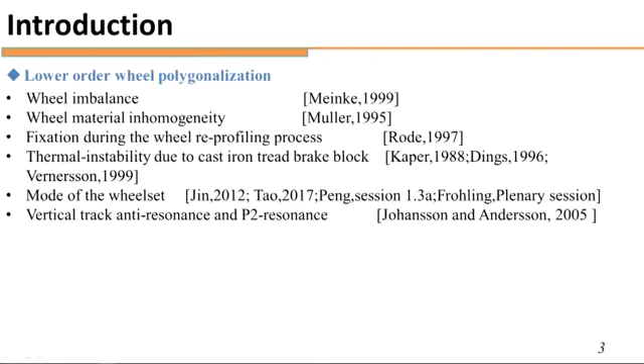As we know, the polygonal wear is one of the greatest concerns of railway vehicles, and the polygonal wear with relatively lower order or lower frequency has been investigated by many researchers. This could be caused by many different reasons.

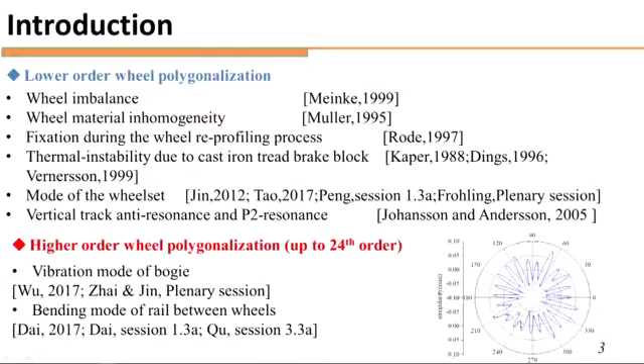However, since 2014, the high-order wheel polygonalization broke out on China's high-speed lines, and the dominant order can be up to the 24th order. If you have listened to the previous presentations in the conference, you will find that the mechanism of the high-order polygonalization is still in dispute.

Some researchers believe that the vibration mode of the bogie is the driving factor, while others think the bending mode of the rail between the wheelsets is the main reason. Our paper will give a possible explanation to the high-order polygonalization through experiment and simulation.

Okay, let's see the characteristics of the high-order wheel polygonalization. These figures show the typical polygonalization on different types of trains with different operating speeds. As you can see, when the speed is 250 kilometers per hour, the wheels exhibit 22nd to 24th order.

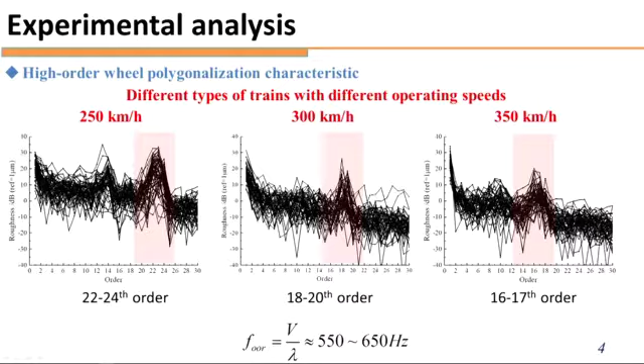When the speed is 300 kilometers per hour, the dominant order becomes 18th to 20th, and as for the 350 kilometers per hour EMUs, the wheels commonly exhibit 16th to 17th order.

This data shows a coincidence that the passing frequency of these different orders of polygonal wear are all in the range of 550 to 650 Hertz, regardless of the speeds, which conforms to the constant frequency mechanism.

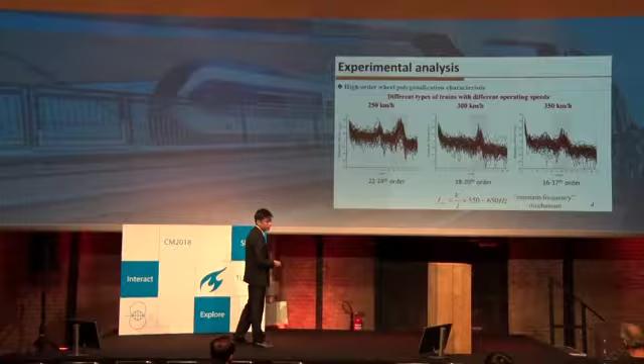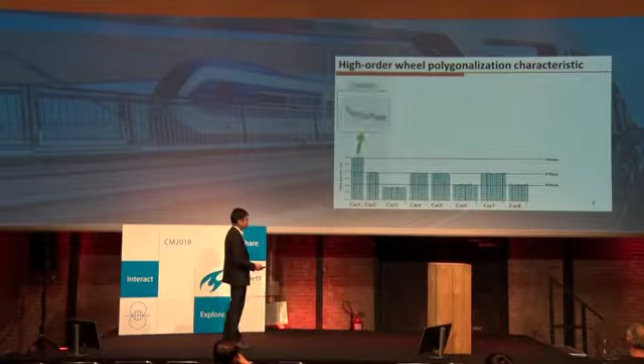Further evidence for the constant frequency mechanism can be found on wheels with different diameters. When the diameter is different, the dominant order of the polygonal wear is also different, but their passing frequency is almost the same.

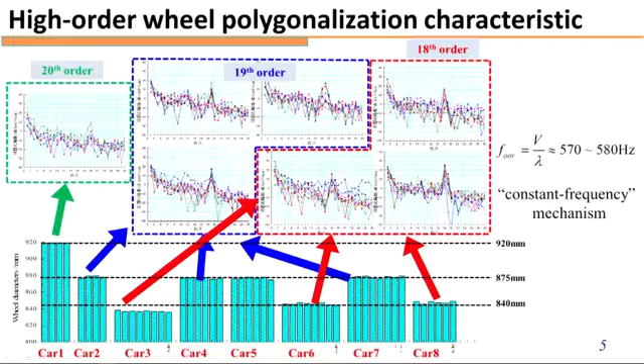Apart from the wear measurement, the dynamic behavior of the high-speed trains was also tested. As we know, once the polygonal wear forms, the vehicle track system will be under a forced vibration condition.

Therefore, in order to understand the initial stage of the high-order polygonal wear, the vibration of the vehicle should be tested immediately after the wheel re-profiling.

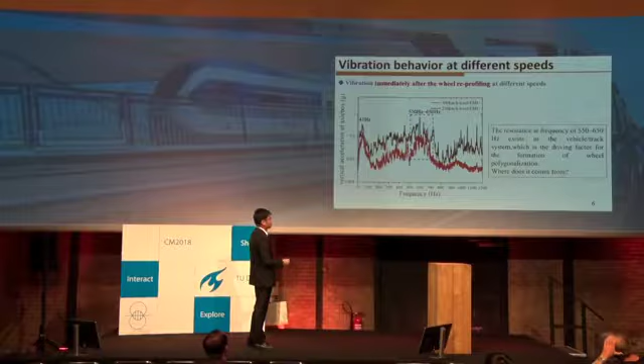Therefore, it is induced that the resonance at the frequency of 550 to 650 Hertz exists in the vehicle track system, which is a driving factor for the formation of wheel polygonalization.

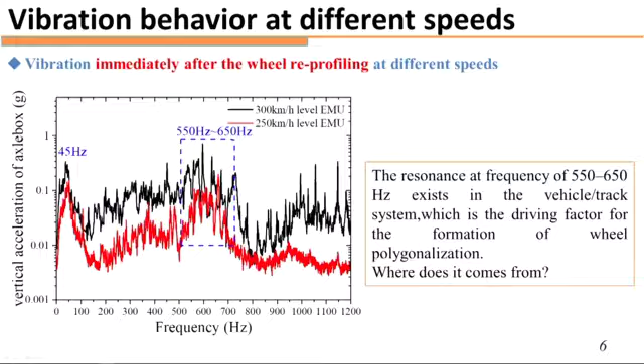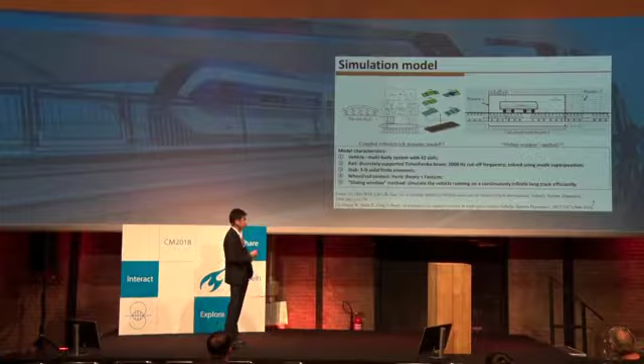In order to identify the origin of this resonance, a coupled vehicle track dynamic model is established based on Professor Zhai's work. The vehicle is modeled as a multi-body system, and the rail is described by a discretely supported Timoshenko beam, with the cutoff frequency up to 2,000 Hertz to cover the passing frequency of the high-order polygonal wear.

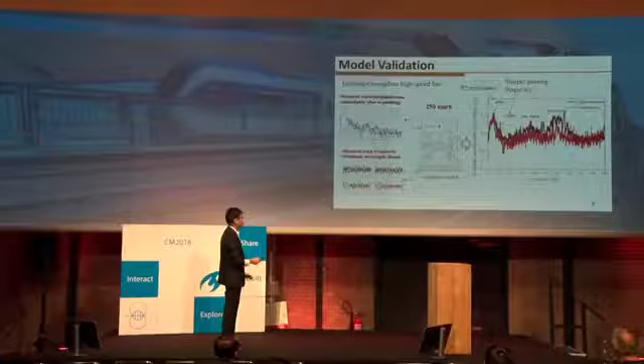The model is validated by comparing its dynamic response to the measured one. The vertical acceleration of the axle box was measured in the field when the vehicle operated at the speed of 250 kilometers per hour

on the Guiyang to Guangzhou high-speed line. Meanwhile, the wheel polygonization and the track irregularities are both measured and input to the dynamic model.

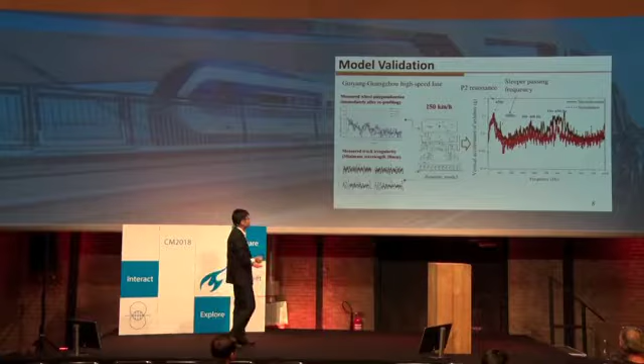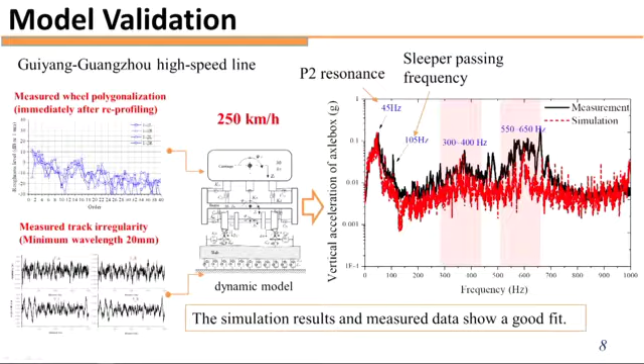As you can see, the simulation results and the measured data show a good fit. This is the P2 resonance, sleeper passing frequency, and the peaks at relatively higher frequency are believed to be associated with the formation of the high-order polygonal wear.

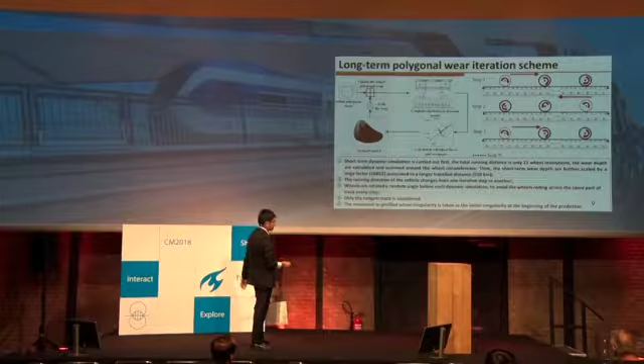After the validation, the dynamic model is combined with the wheel wear model, and the long-term wheel iteration model is established. Due to time limitations, I will not introduce the details much here, but some special points should be pointed out.

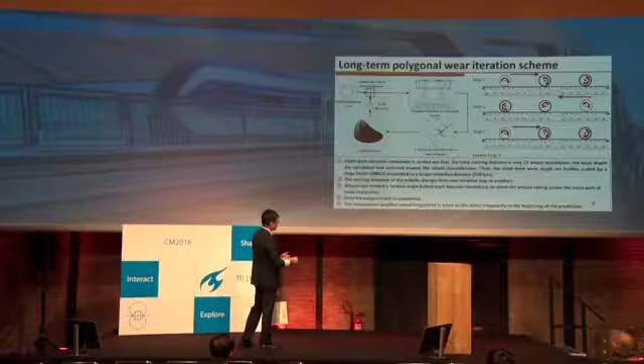In order to simulate the real condition of operation in China, the running direction of the vehicle changes from one iteration to another, and the wheel is intentionally rotated by a random angle before each dynamic simulation to avoid

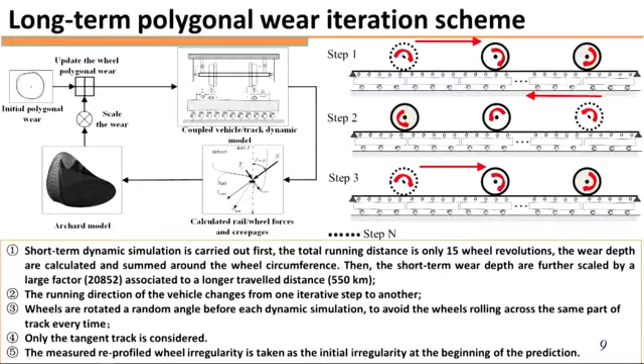the wheels rolling across the same part of the track every time. And only the tangent track is considered. In our simulations, the measured reprofiled wheel irregularity is taken as the initial irregularity at the beginning of the simulation.

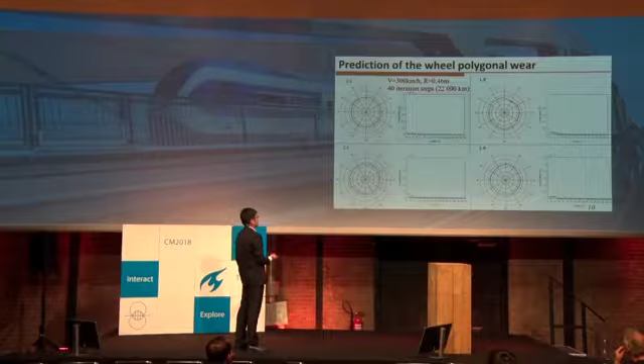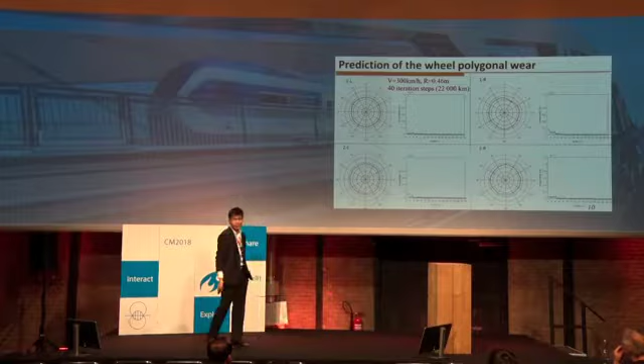When we set the speed to 300 kilometers per hour, it works. The radius is 0.46 meter, and after 40 iteration steps, the wheel irregularities develop into a high order polygonal wheel gradually, with the dominant order being 20th.

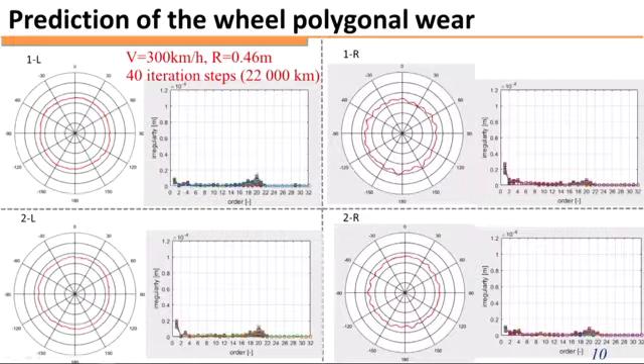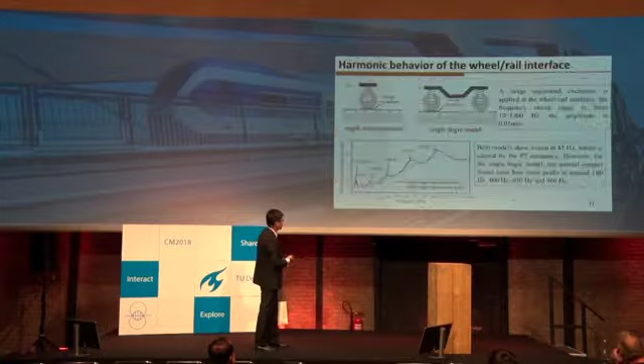However, until now, where the polygonal wheel originates from is still not identified. In the next part, the harmonic behavior of the wheel-rail interface is calculated. In our work, two scenarios are considered: one is the single wheel set model, and the other is a single bogie model. A swept sinusoidal excitation is applied at the wheel-rail interface.

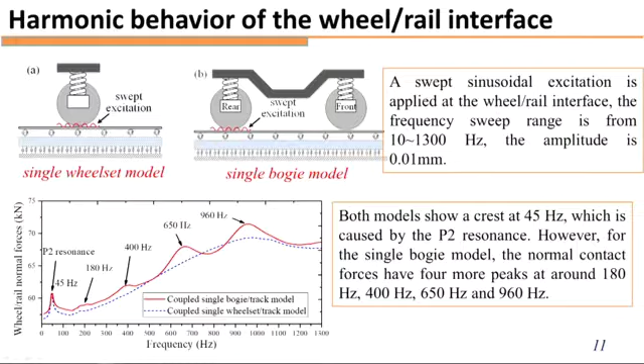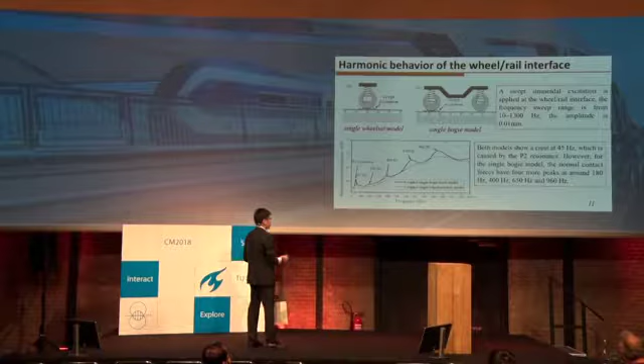This is the response of the wheel-rail normal forces obtained from these two models. Both models show a crest at 45 Hertz, however, for the single bogie model, the normal contact forces have 4 more peaks at around 180 Hertz, 400 Hertz, 650 Hertz, and 960 Hertz. According to previous research, these 4 peaks may be attributed to

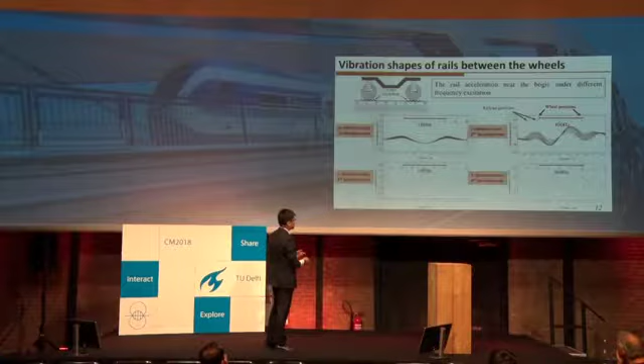the wave reflection between the front and the rear wheel in the, sorry, it doesn't move.

As you can see, we plot the rail acceleration near the bogie on different frequency excitations. We can see the wheels in a bogie play a role of constraints to the rail, and the rail has a large vibration between the two wheels in a bogie.

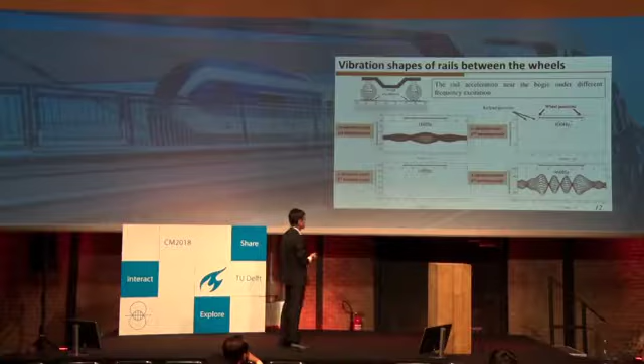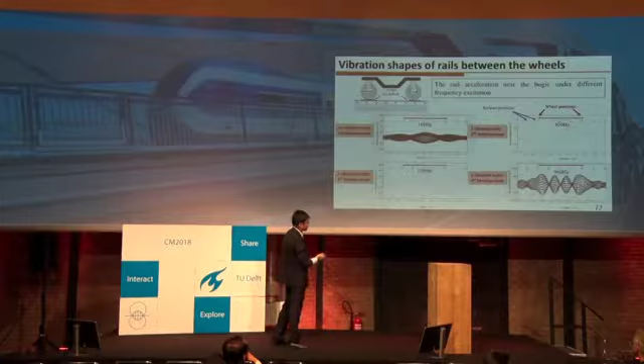When the excitation is 118 Hertz, 400 Hertz, 650 Hertz and 960 Hertz, the vibration shape of the rail between the wheels has 0 node, 1 node, 2 nodes, and 3 nodes, which conforms to the first, second, third, and fourth order bending modes of the rail between the wheels.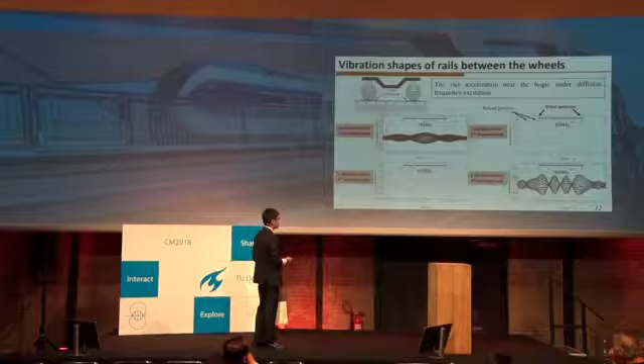Furthermore, the frequency of the third order bending mode is close to the passing frequency of the high order polygonal wheel. It is thus induced that this could be the main contributor.

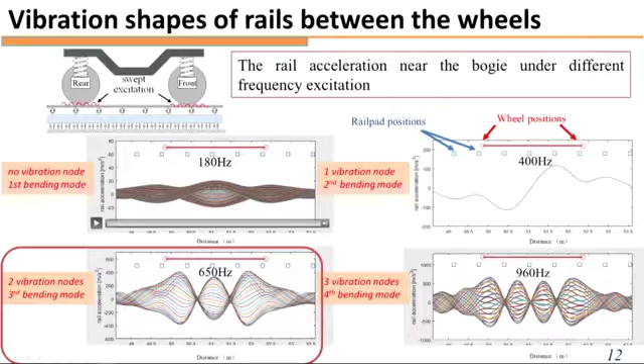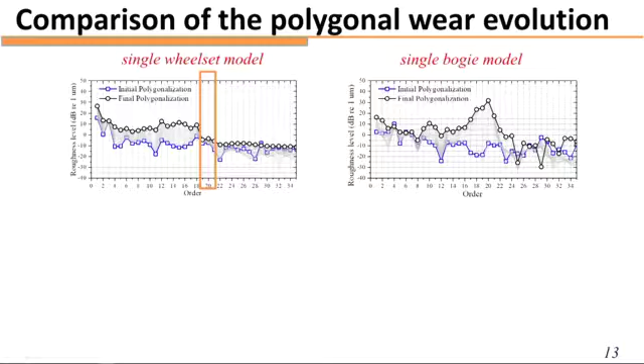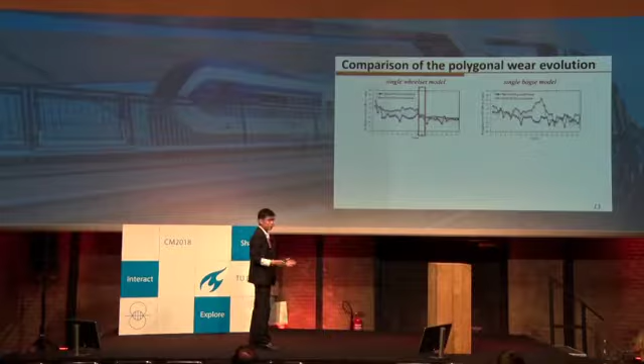Also, we give the comparison of the polygonal wheel evolution when using the single wheel set model and the single bogie model. As you can see, the 20th order polygonal wheel does not form in the single wheel set model. Obviously, it is because the rail resonance between the wheels cannot be considered in the single wheel set model.

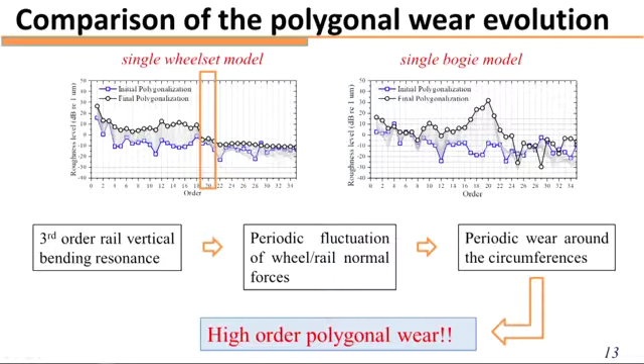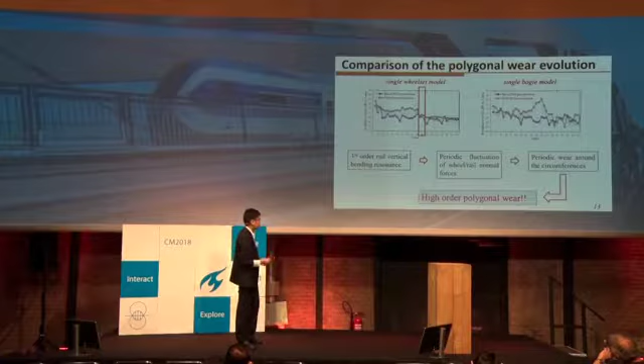Now we can say that it makes us believe that the third order rail vertical bending resonance between the wheels leads to the periodical fluctuation of the wheel-rail normal forces and further causes the periodical wear around the circumference, and finally the higher order polygonal wear forms.

The last part is the parametric studies. Firstly, we change the operating speed. Under different speeds, the wear grows to different dominant orders, and the simulated dominant orders do agree with those mentioned above.

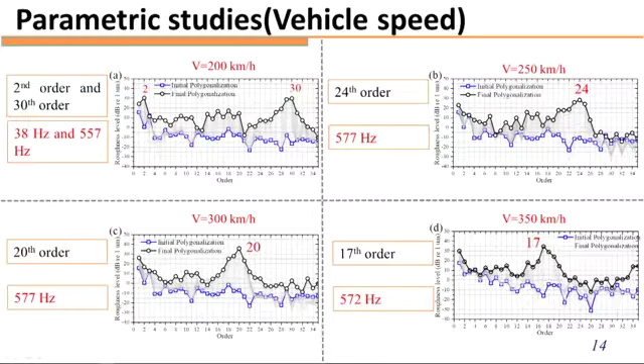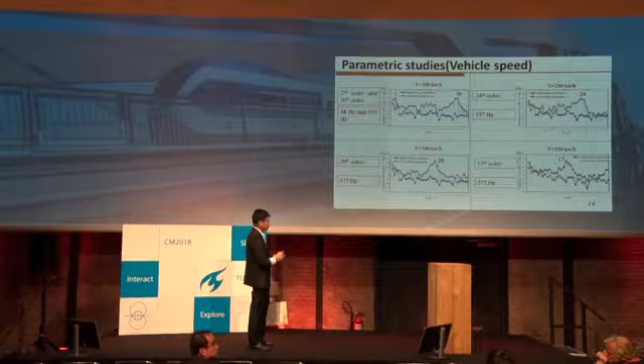It is expected that changing the speed frequently instead of long-time constant speed operation will violate the formation law of the high-order polygonal wheel and suppress the growth rate of the polygonal wheel.

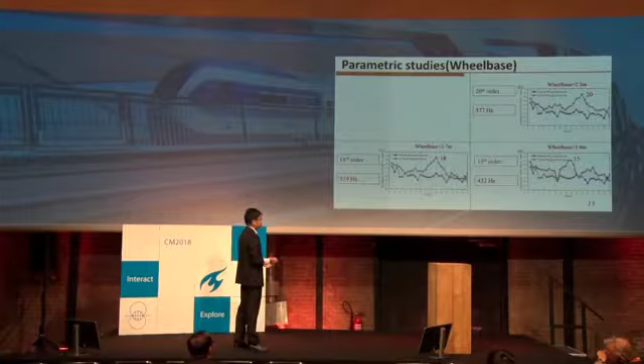Then we change the wheelbase. When the wheelbase is 2.5 meters, 2.7 meters, and 3 meters, the dominant order is 20th, 18th, and 15th. This is because as the wheelbase increases, the frequency of the third order rail bending mode between the wheels decreases.

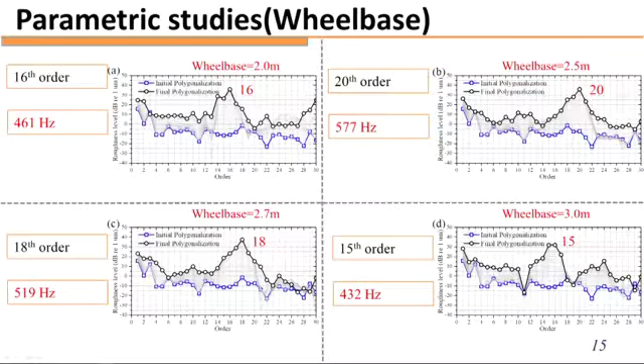The difference is that when the wheelbase is 2 meters, the calculated dominant order of the polygonal wheel is 16th, which does not accord with the third order rail bending mode. Further results indicate that this could likely be attributed to the second order rail bending mode rather than the third order.

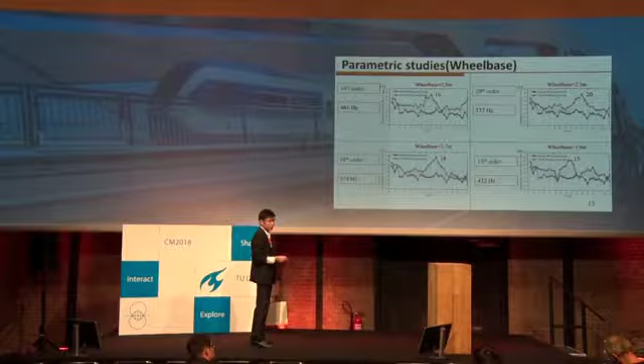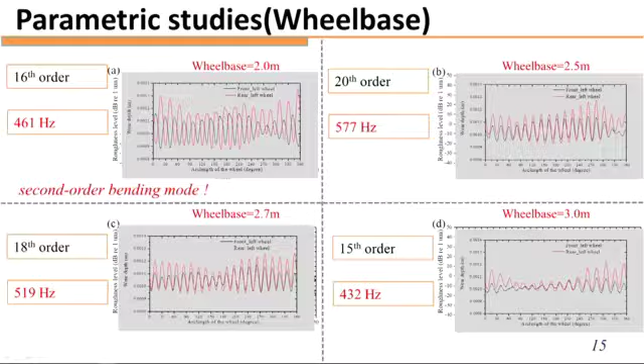We plot the final polygonal wheel on the front and rear wheel in a bogie. As you can see, when the wheelbase is 2 meters, the phase difference between the front wheel and the rear wheel is opposite, while the others are in phase, which conforms to the excitation form of the second order and third order rail bending modes.